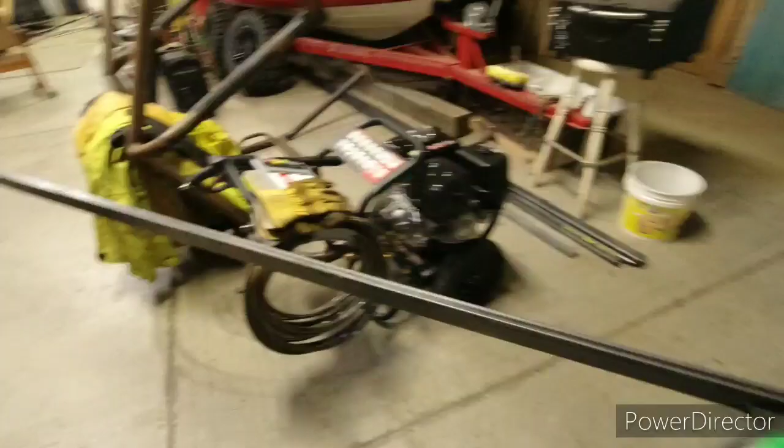So here's the beginning of building the rack. Pardon the noise, I'm cutting some pieces. Building the rack to haul the General on top of the truck.

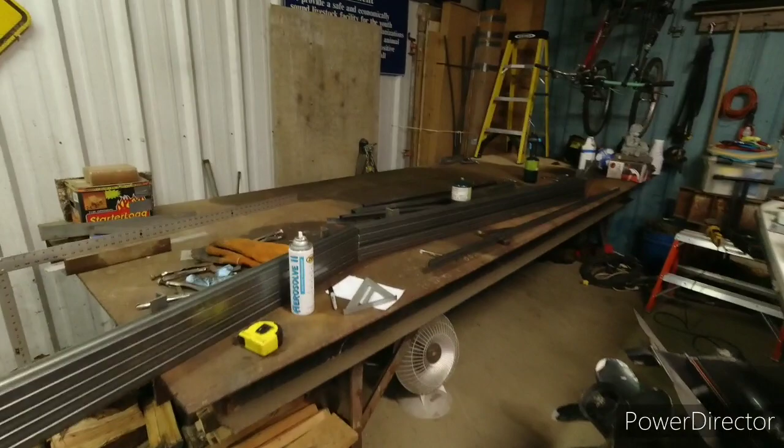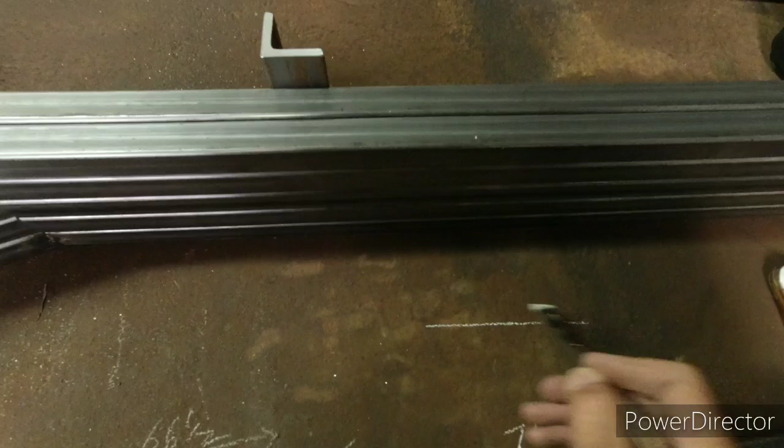Here's a pile of my frames. I got 1x2 frames for the runners, I got 1x1 frames, it's going to be around the perimeter, set up high. I'll put some little pieces in between. So what you'll see is 2x and then 1x, and then there'll be some frames in between. I don't know, I may possibly do some of these, haven't decided yet, but this is the beginning of it.

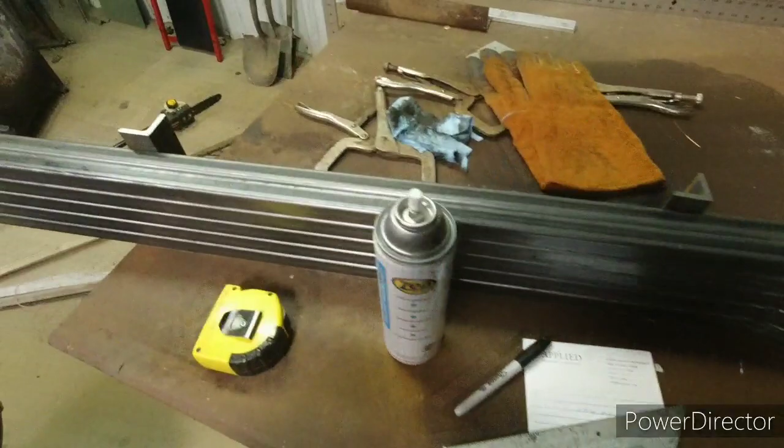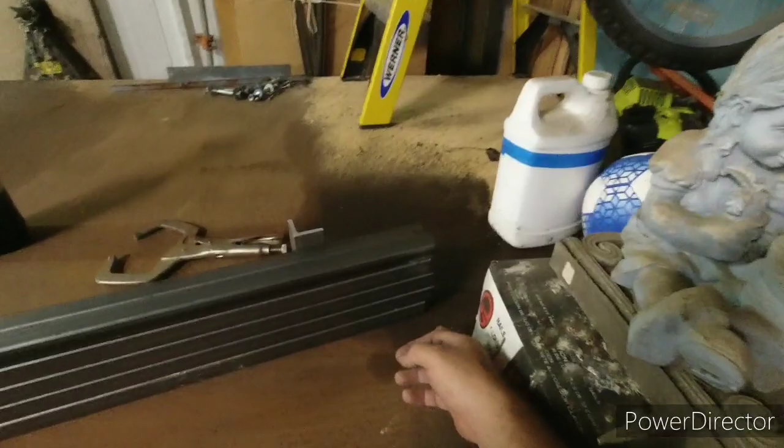I got a jig set up. I got these angles all welded down to the table, they're all plumb. This bottom one is already tacked together, cut all the others to match it. Some of them run a little bit long. And on this top one here, that one's run quite a bit long because I'm considering...

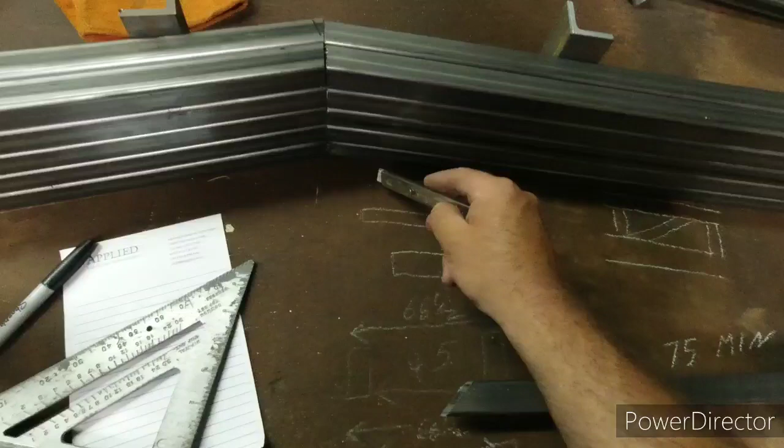You have your top frame like that, and that's the bottom frame, then you have the top frame, which is the 1x up like that, thinking that the tire would sit in like that. I'm not 100% that I'm going to do it that way, but I got them long so that I can. And then this piece here, this is a spreader to go from driver to passenger side. Right now it's 7 foot long out to out.

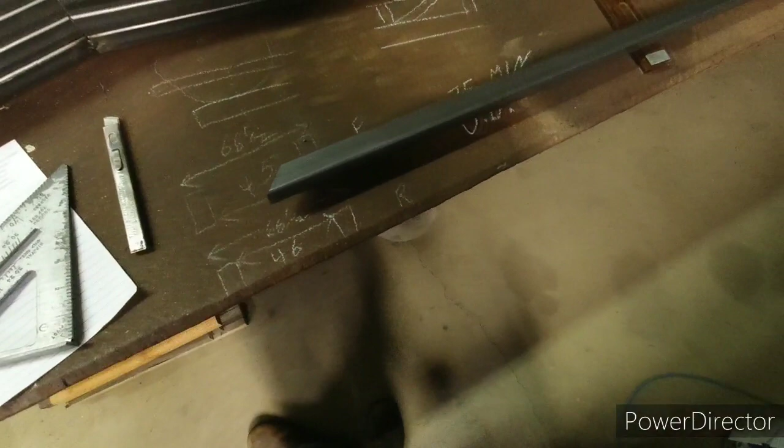I'd kind of like to keep it narrow, but you do need a little bit of room to walk on it and maneuver. So I can always cut these down, but I figured I'd start right there.

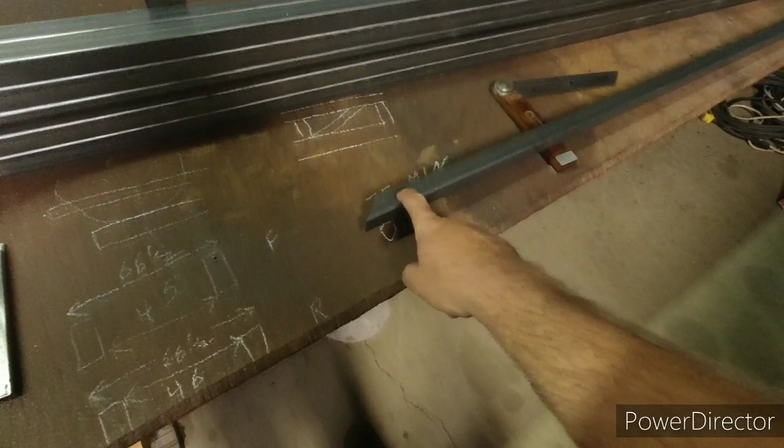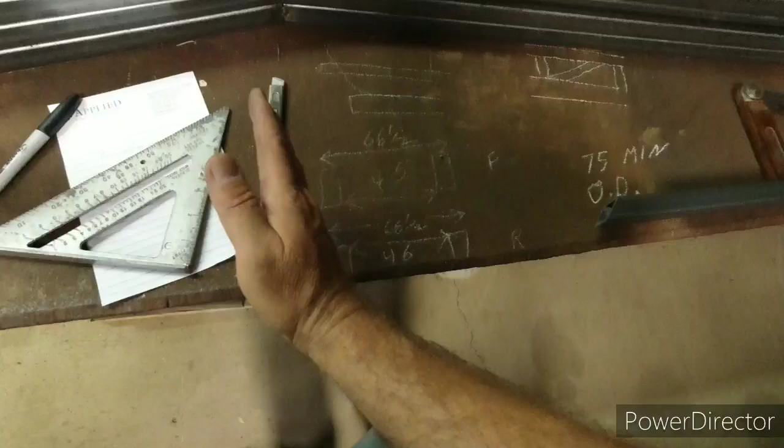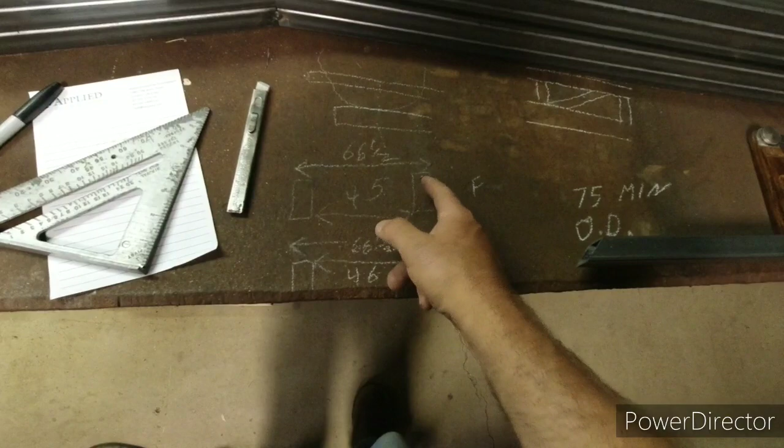So then I got to do some math and figure out the width of my runners for the tires. Because if it's 7 foot wide, that's the outside, so it'd be 6'10" inside. And with the paddles on, I have to have at least 75 inches. So the inside I gotta have 45. You gotta keep in mind that if I run one way or another on the ramp, I'm still going to be on the inboard side. Like if I have the dirt tires on and say I hug one side a little too much, I don't want to come off and land inside the truck. Better than landing off the truck, but I'll have to do some math and come up with how wide I want to make those. 16 inches wide was the first thing in my mind, but I haven't done the math on it yet.

So there's the beginning of this. Cut in pieces, get a big old pile here, and then start tacking stuff together.

Well, there's my jig that I used. I set that on the truck to figure all these angles out. And we'll show you more as we go along.

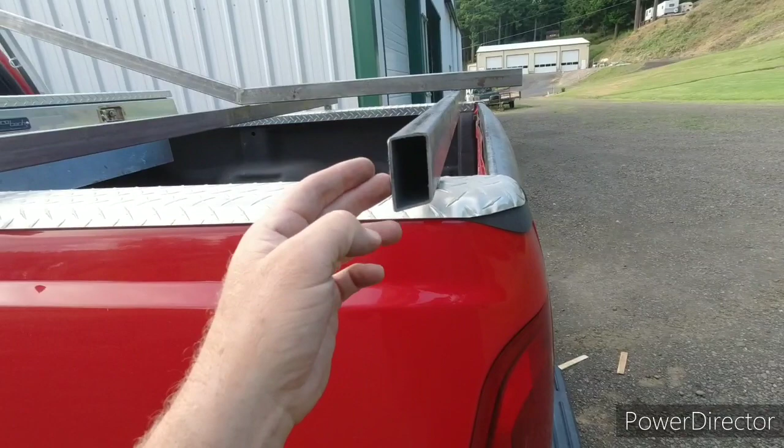All right, so here is a look at roughly what it's going to look like. So these are the supports here. These will have a framework that goes down into the bed down there under these. So I'll have this one slid back as far as I can and still be resting in the bed. This one here will be as close to that joint, kind of like it's sitting, as I can.

And then of course the toolbox has to come out. There'll be another frame like that that goes right down in here. You can kind of see there's a void down in there. So that'll set down in there and go all the way up, and that's what'll support that. You can see right now that there's a little bit of a gap up there at the top.

And up on top of the bed or cab, there's 2x4s to keep my spacing right, so that it follows the lines of the truck. And I can get back and show you what it looks like. If I get back here, you can kind of see the lines of the truck, how it's following it. And this will hang out.

These are a hair longer than I'm gonna do. I think I'm gonna cut 4 inches off of those, so it won't stick out quite as far. But...

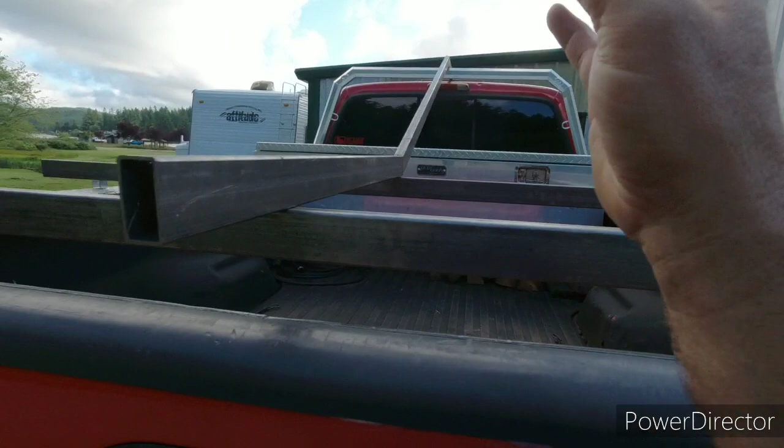Then on the back of this, there'll be a frame that goes across side to side. So this is one of the rails. There'll be one here running up 20 inches over, one running up, same thing over here on the end, 20 inches in. And then it'll be diagonal braced, the frame on the bed. You can slide it in and slide it out. Distribute the load all over the bed with some turnbuckles.

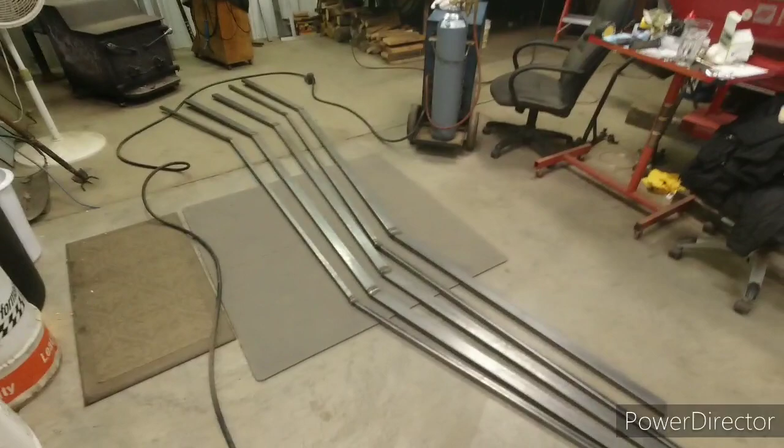So I've got those all cut. Alright guys, so I'm going to show you where I'm at so far. I've got a bunch of frame pieces. There's one up here on the table in the jig still.

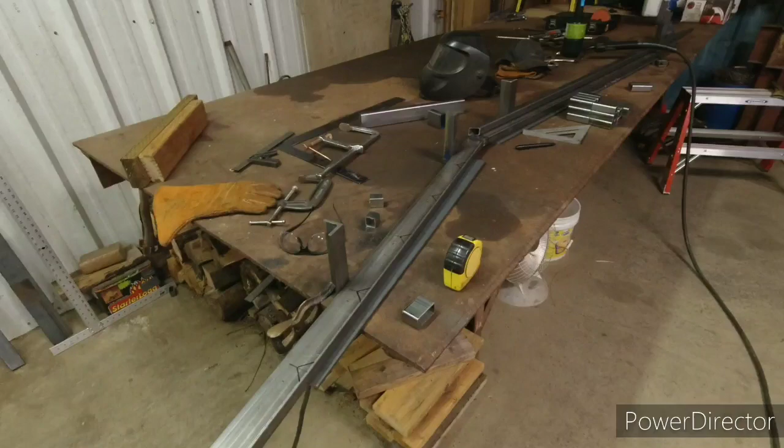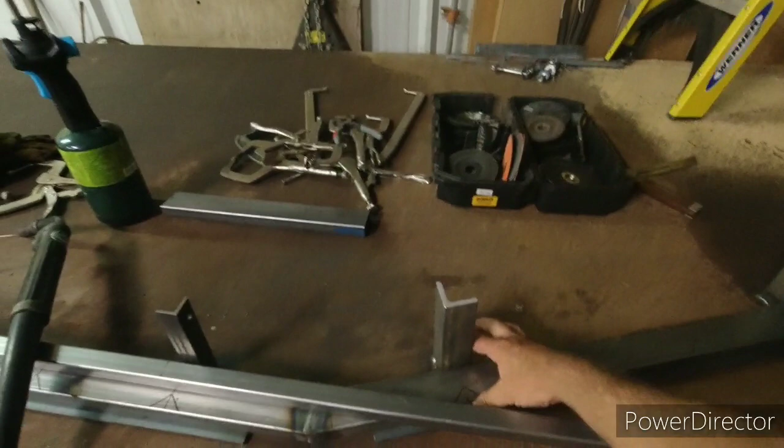So you got that jigged out, throw some weld on there, and then when I flip them over, I've got these spacers so that it can hold it up so you're not sitting on the weld, because that'll wind up throwing it off when you're laying it back down. And then when you're done, I can set it back on the table and make sure that the heat from the welds hasn't curled one of the sides up or anything, which on this one it did. So even though it was all clamped down, I have clamps clamping it to the table in various spots, and I had clamps clamping it to the jig.

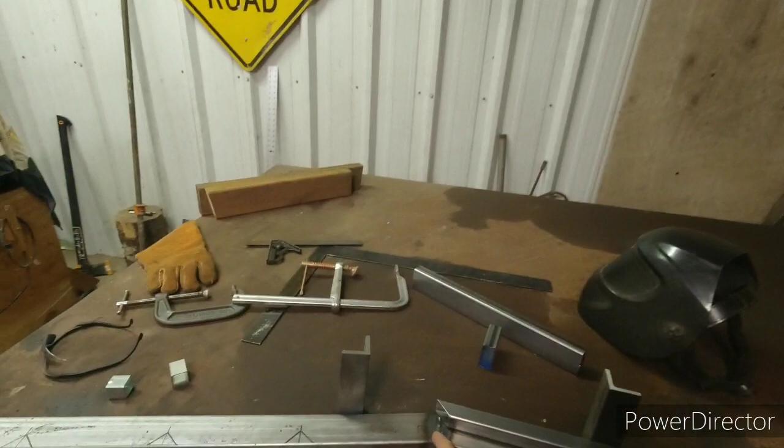The hope was that it wasn't going to move, but this one moved a fair amount. I had to trim it, run the cutoff wheel back through the weld there, and re-weld it.

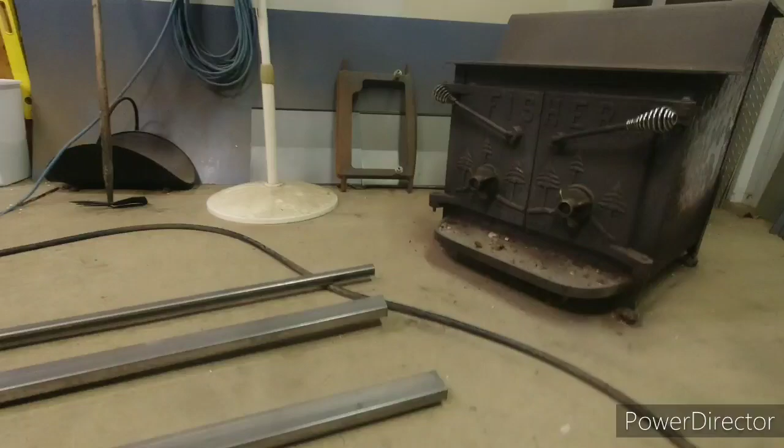You can see down here on this one that the far one is sitting up on that cord, but the one just this side of it is off the ground a little more than these others. Let me get down here so you can see how this one is much higher off the ground than this one. This one is straight, it didn't warp. That one pulled up quite a bit.

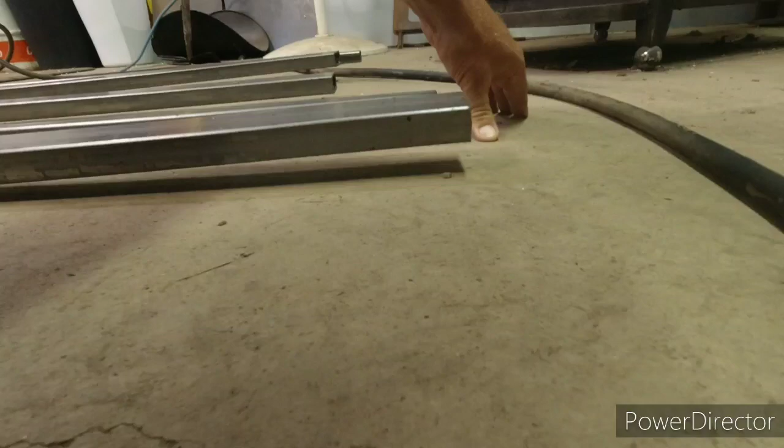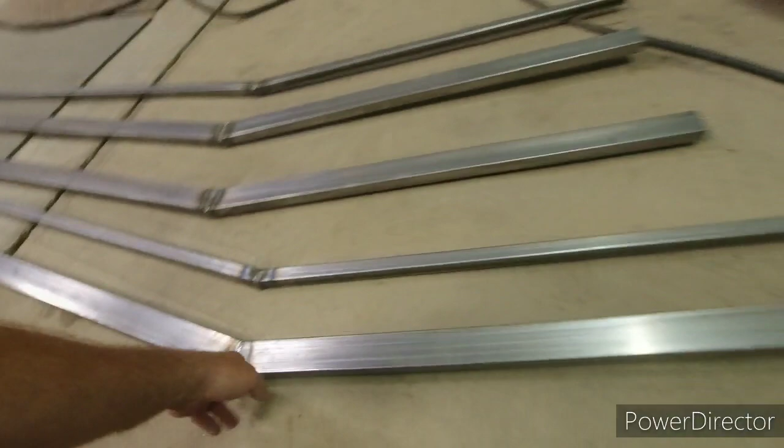And this one here's up some, so I'll just have to cut the weld on the other side and re-weld it, it'll pull it down.

Then I was having trouble with my welder. I got some welds that are running fine, and some others weren't, and they wind up piling up, having troubles. So where'd I put it? There it is, my little welder over here.

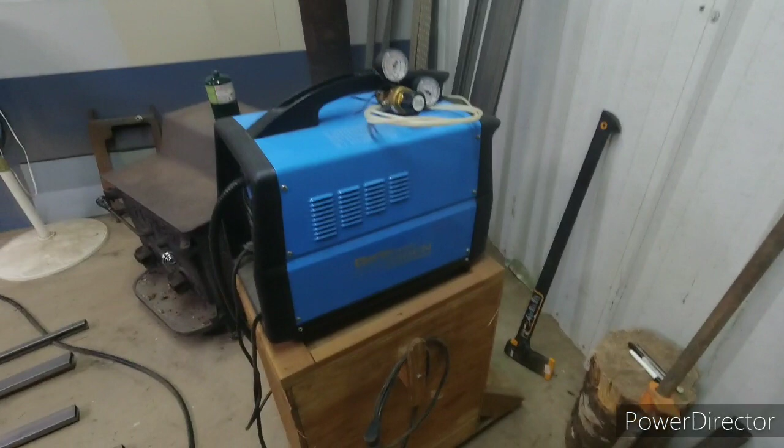It's an old Clarke 130, a 110 unit. I've done a lot of stuff with it, built my trailer that I haul the General around on with that. But the US version of Clarke, or the company anyway, went bankrupt, so there's no parts available for it anymore. And what I found is the part inside where the spool rolls is worn out.

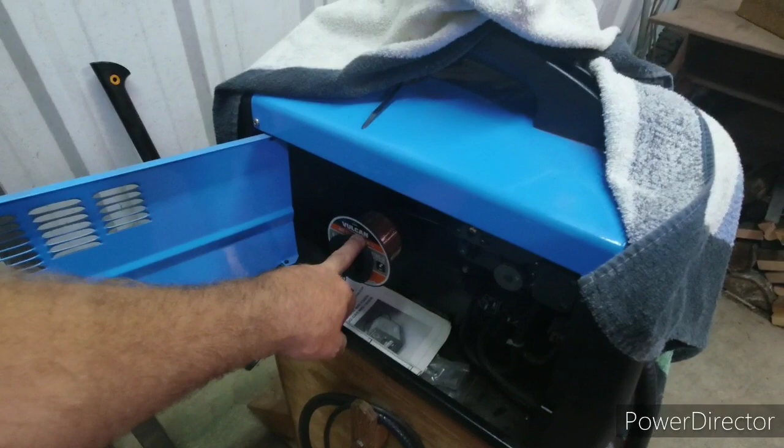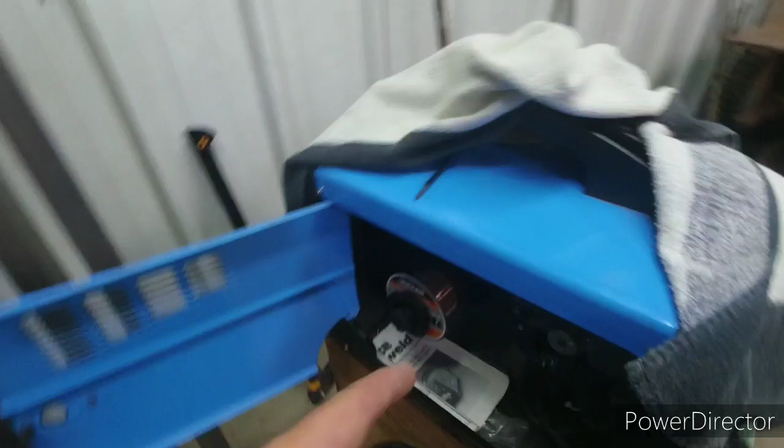Right in here, so when you have the 11-pound spool on there rolling around, instead of rolling smoothly it'd kind of go, so it was making the wire jump and go back and forth. Then I'd get it all dialed in, adjust this, it's working good. You make a couple of test welds, okay, we got it.

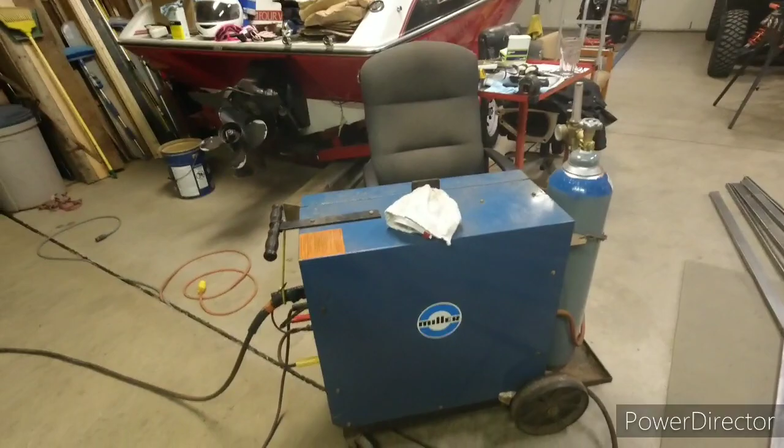Go back to the part that you want, you get one, maybe two, then it starts doing it again. You look in here, yeah, it's jamming, the nut gets cocked in there. So I borrowed a welder from a friend's. I got to do a couple test welds on that, hopefully I don't have that problem with the rest.

These ones aren't the end of the world. If you have one of those welds that doesn't flow out the way you want, like this one, I don't like that. But I got plenty of penetration, there's no problem there, it's going to hold together. They're just ugly, but those are easy.

You can hit them with a sander, sand them off. You could grind a little groove in there if you wanted to, and run a new pass around it to make it look nice if you want the weld to show, or you could sand the weld off. I know for a fact I got penetration, I'm not worried about there being enough material there, I just don't like the look.

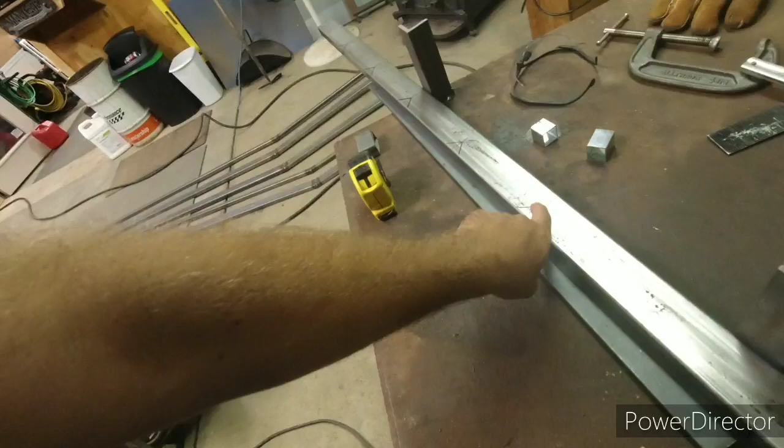But when you get into doing these rungs, you're going to have all these angles on there. If your welder messes up on you when you're doing that, those are kind of a bear to get into every one of these and try to fix them. So I want to make sure I got the welder dialed in, and one I can trust by the time I get to those.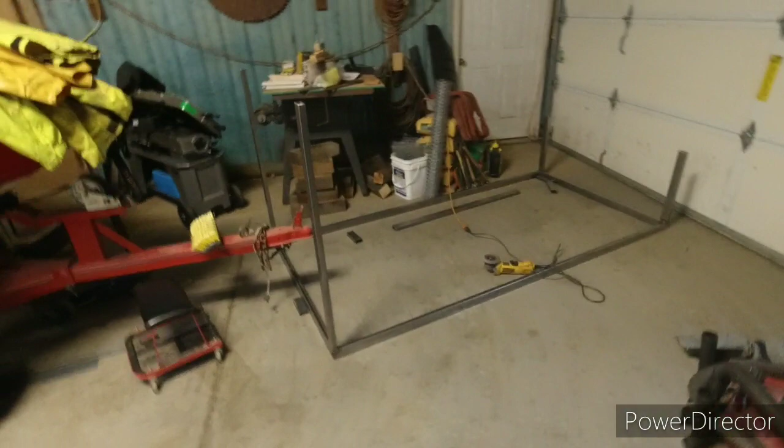Anyway, there's all these pieces here kind of mocked up, I need to finish welding them in and welding them out. I got part of the cage built over here for the bottom area. This is the part that slides in the bed. I don't know why I called it a cage. This is the part up by the cab, and this here is down by the tailgate.

They'll get the bar laying on top of it that'll extend out, and then those pieces will go on top so I get my full width, so that the General can fit on there even if it has the paddles. I made this just a hair short so that I don't have to take my headache rack off to put this in. If my headache rack is off, I'll be able to push this forward another inch. So I figured it's nice to be able to just leave the rack on.

I might, down here, weld some kind of a stop.

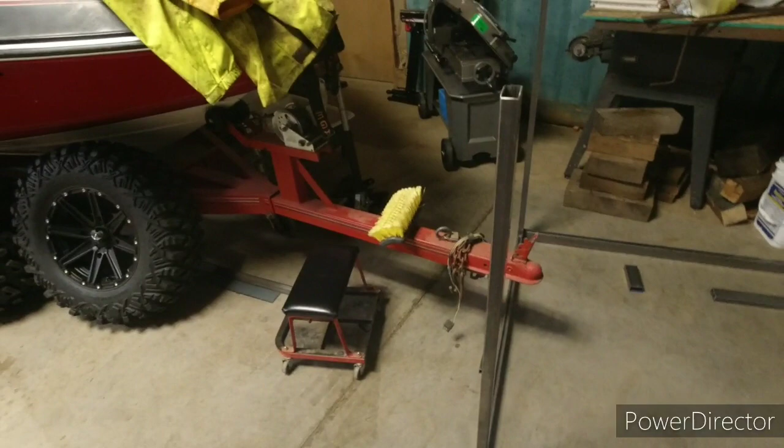I'm not sure, or I'll do a bolt-on so I can adjust it. You can push it in, with a piece of rubber on there, push it right up to the front of the bed and it's in its spot. Then I have a little bit of a gap for the headache rack. If I wind up taking the headache rack off, I could shorten up the rubber piece so it goes up farther. We'll see, that was a thought.

Anyway, just thought I'd show you where I am at so far. I had to pick up two more pieces, I have to trim those. All right, I'm gonna cut some little pieces and do some testing with this welder and get back to work. We'll show you more on the subject later.

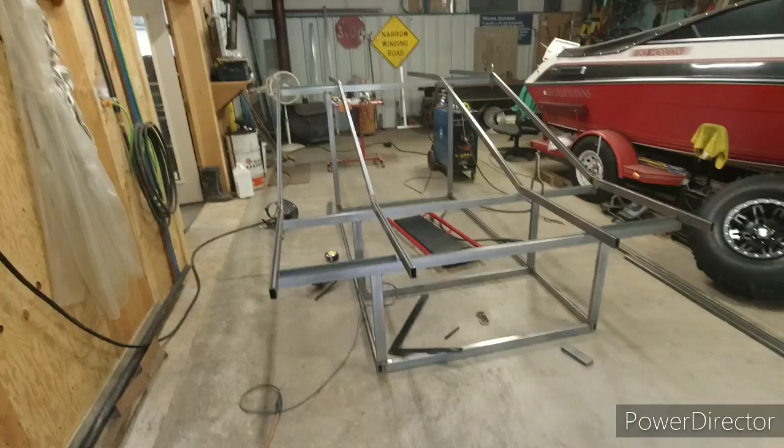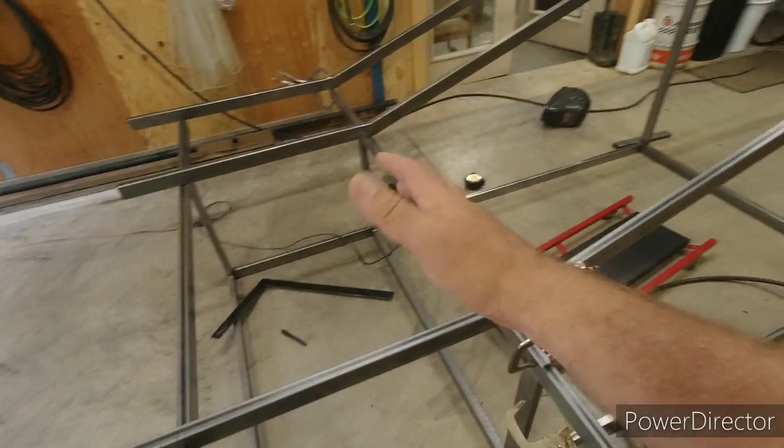Okay, so I'm getting a little farther along. You can see the basic shape of everything now. I just put those in there, and I think I'm gonna tie these across and then do a diagonal brace, and that'll be a good base. That's where the majority of the weight will be, right over the engine right here. So I want that to be good and solid so I don't have to worry about it wiggling.

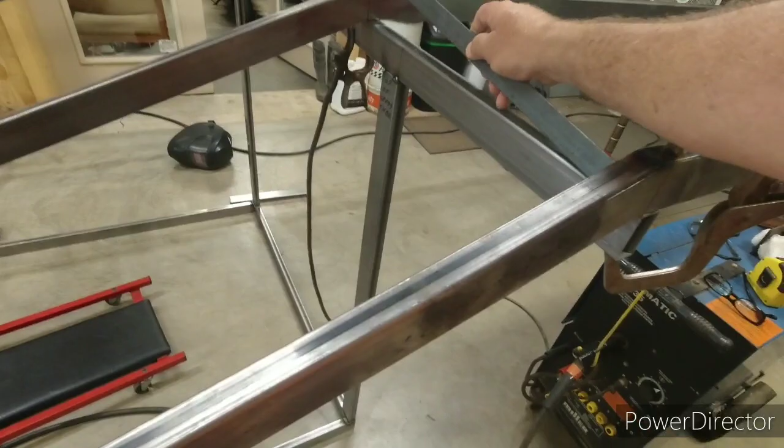And then, of course, these will get all these rungs put in here like this. This is all just sitting on here right now, and that's how far it's going to hang over the cab right there.

So I've got these bars over here ready. I went over and checked everything, put a little paint on my table so I can mark it. One of these I have laid out already, see if you can see that. Yeah, I got some marks on that.

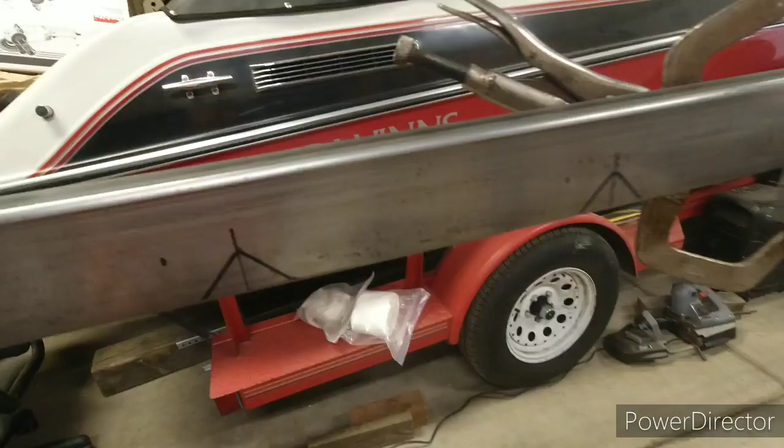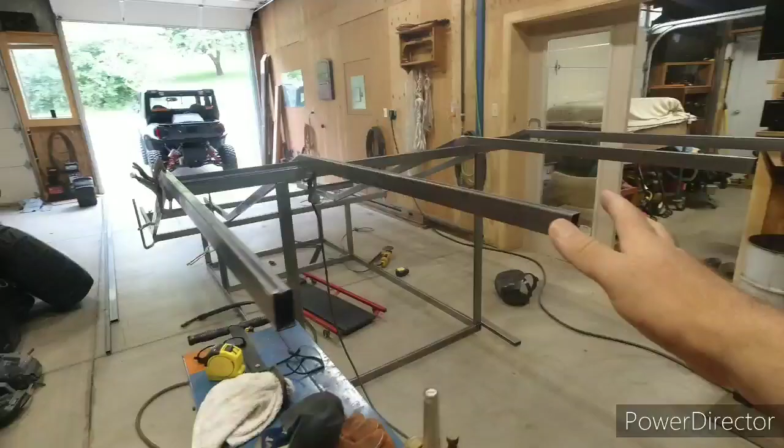So I'll take that one, lay it back in the jig, transfer it onto this area that I painted. I just painted it so it shows up better because my fab table is pretty rusty. Put all those marks on there, and that way I could transfer those to every one of these. So I'll have it all laid out, ready to go.

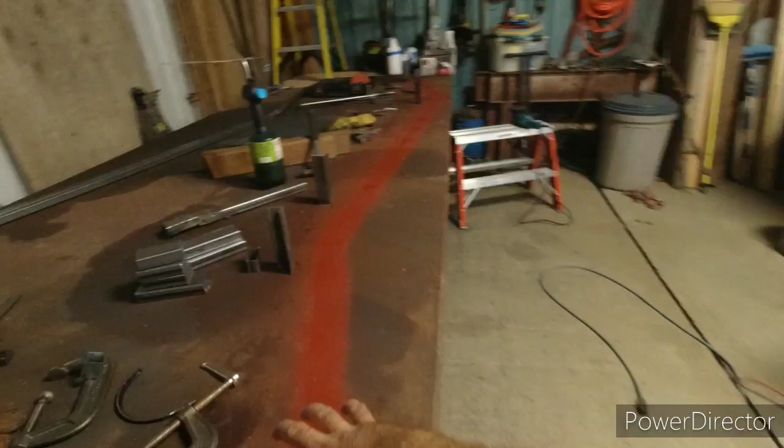And then I'm going to try to utilize the jig that I got built over here. I'll take one of those top pieces and one of those side rails and set them in here with these little pieces in between it. Then I can clamp it, hold it all together, hold the shape, tack weld all that stuff, get it all together, and then stick it back on here and tack weld it on here.

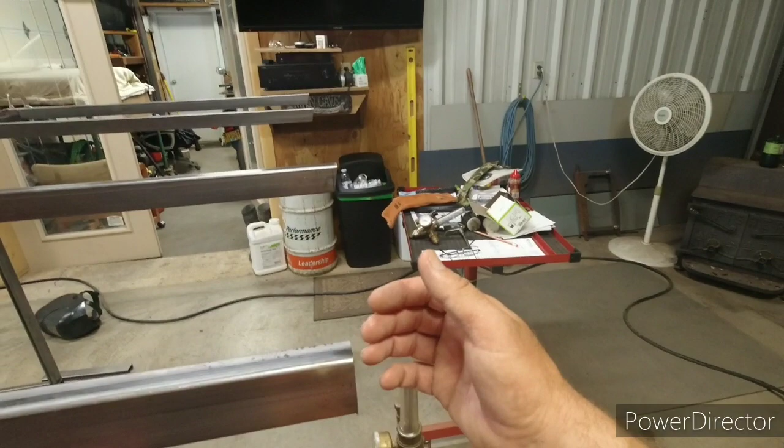And then across the front here, I'll be mitering these, I believe. Yeah, that's what I had planned. I'm gonna miter this, I'll have a piece running across so it ties all these in. It'll have a top piece on it also, so I'll have a curve all the way around.

And then there's some of these areas. It's a problem with building something for yourself - as you're building it, you think of different ways you could have done it. You wish you did this, you wish you did that. If it's something for someone else, you make a plan, you go for it, you build it, you're done. It's a lot simpler. I overthink it when it's for myself - what if I did this, but what if I did this? Just build it, you can always make another one later when you come up with a better idea.

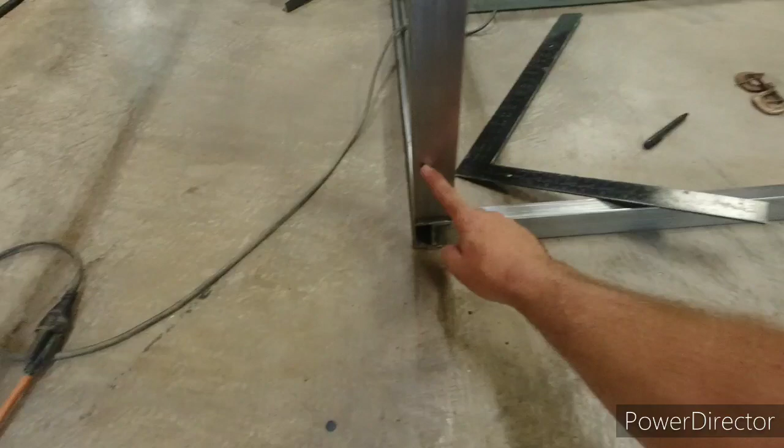You'd be faster. Anyway, you see down here that there's holes, open tube. Well, I was thinking that I was going to put a gusset plate down here, so that would be my cap for that tube instead of mitering that. So that's why I did that there. Well, anyway, there we go.

That's where I'm at now. I'm going to take these things off, they're just all sitting on here for mock-up. Go ahead and make my pieces for that and get that thing stiffened up really strong. Start working on these today. All right, here we go.